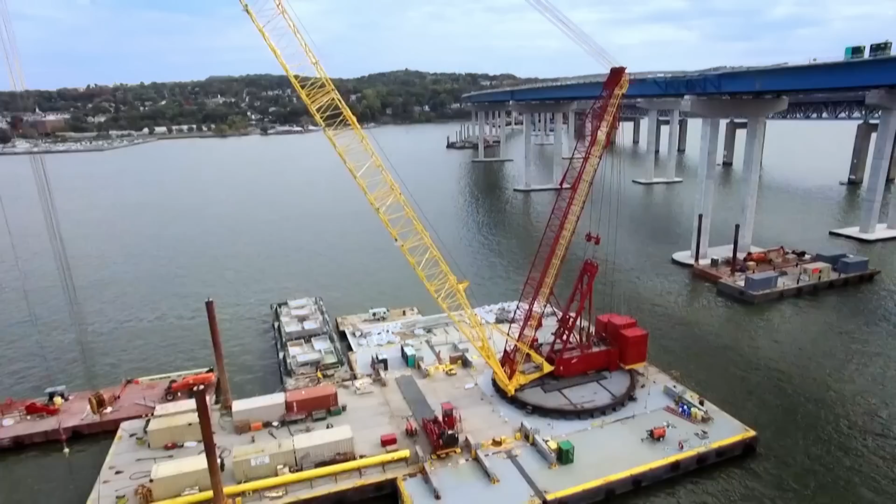In New York, a construction crane comes crashing down onto a landmark bridge. There was enough dynamic energy released that the entire crane essentially fell on its back.

Tragedy strikes a Titanic TV tower in Texas. Oh my God! That scared me to death, because we can't outrun 2,000 feet of tower.

Catastrophe takes out Boston's water supply. The power of water is immense, and you can see why it was a huge disaster at the time.

And in Sweden, Bruce Springsteen fans nearly bring the house down. You can see the roof bouncing. It was crazy.

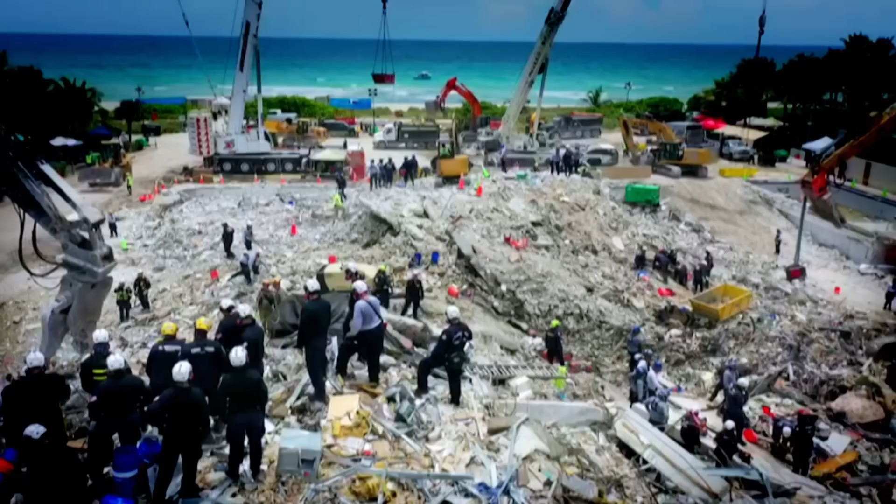With big builds, even the smallest mistake can be a huge disaster. From miscalculations to misunderstandings, some with deadly consequences, these catastrophes are every engineer's worst nightmare.

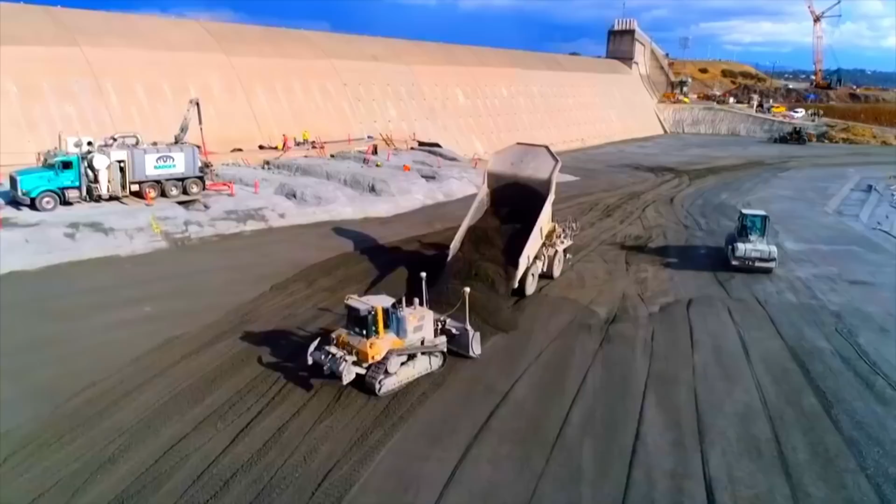Big engineering requires colossal machines to get the job done. But if things go wrong, the catastrophe, like the equipment, can be massive.

Like this disaster in New York State, on a vital Hudson River crossing. This humongous crane going across two bridges, it's a frightening experience. A catastrophic collapse that caught everyone by surprise.

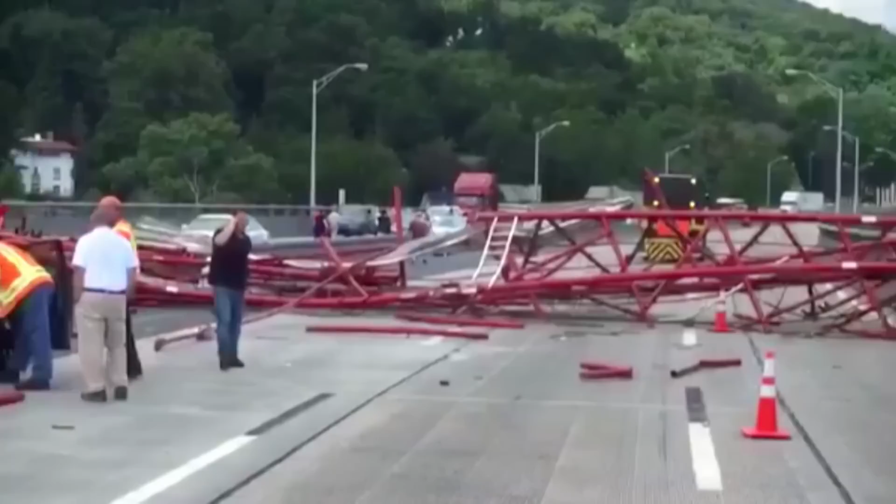I was in shock. I was not expecting this to happen. A very lucky escape for both workers and drivers. A collapse of this nature over an active roadway, this is 1 in a million.

New York City, with over 8 million residents, is the most populated city in the US. The 5 boroughs sit at the mouth of the mighty Hudson River, one of the largest natural harbors on Earth.

Adrian Brugger is a professor of civil engineering. We are a few miles up from New York City on the Hudson River. It has been a powerhouse of transport since colonial times. This river is really the river that made New York City what it is today.

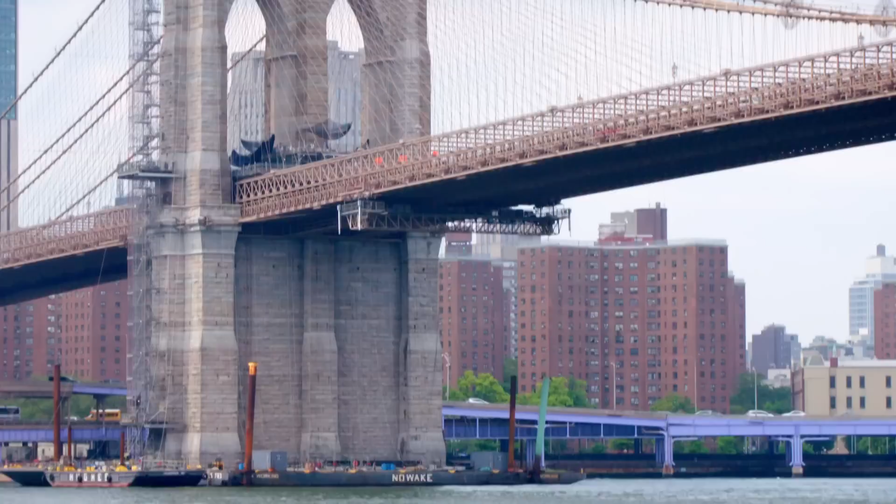With so much water to navigate around, bridges are a fact of life. New York City is carved up by water, and Manhattan alone has 21 crossings, some of them the most famous in the country. But crossing the Hudson is no easy feat.

What makes this river really unique is that it transects the entire state. This river is actually incredibly wide. It presents a significant challenge when it comes to building bridges.

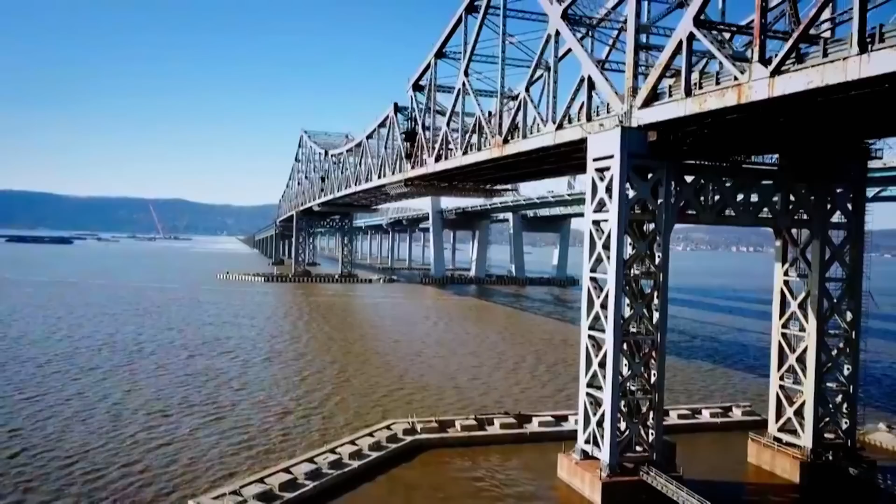Since the 1950s, anyone heading over the Hudson north of New York City crossed over this, the near 5-kilometer-long Tappan Zee Bridge. But after 5 decades, it was struggling.

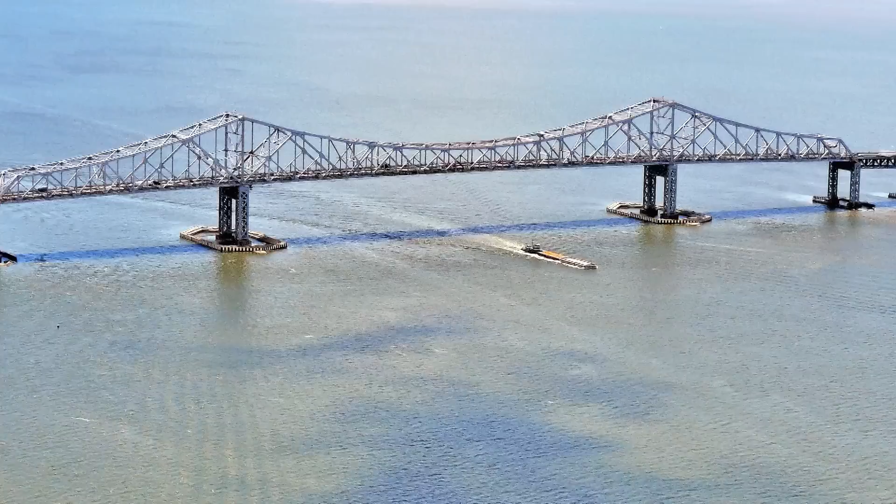The original Tappan Zee Bridge was built in 1955, when traffic was much lighter. By the turn of the century, around 140,000 vehicles were crossing it every day, and it simply couldn't cope.

The need for a new bridge was recognized for decades, and the main goal was not just to replace an aging structure, but also to increase the capacity.

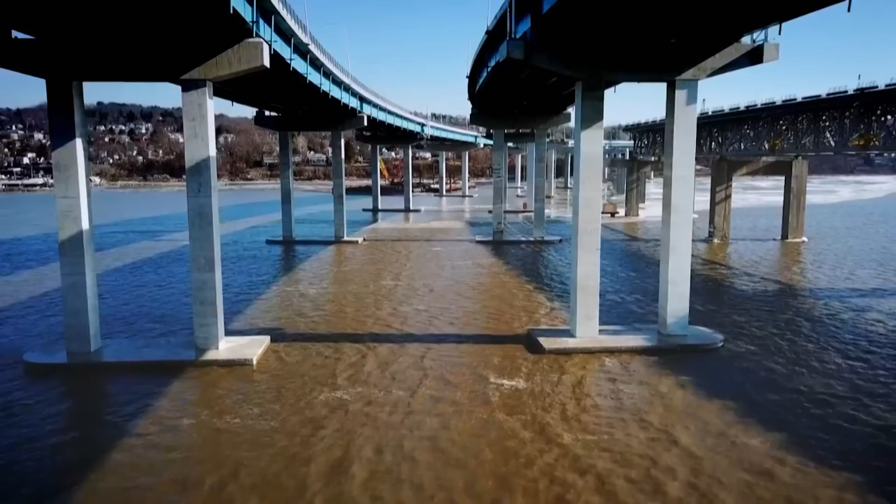Opening to traffic in 2018, the epic new Tappan Zee Bridge cost nearly $4 billion. Its twin spans now carry around 50 million vehicles a year.

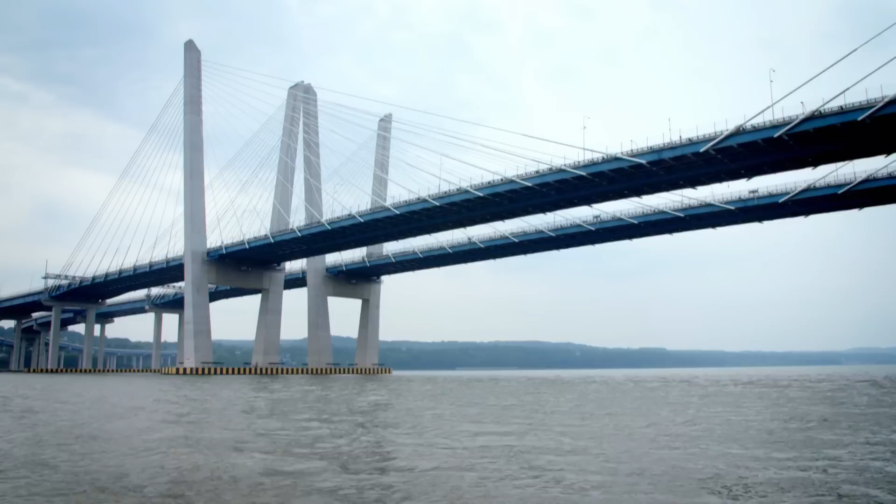If you look at the structure, you'll see that it's not really one bridge, it's actually 2 bridges. They're almost identical, but we have 2 spans, one for the eastbound and one for westbound traffic, that are essentially what we call structurally independent.

Each bridge has 43 piers, 41 of which are anchored to the bottom of the very wide and very deep river. The only way to create solid foundations for the huge bridge to carry immense loads was to drive hundreds of steel piles deep into the bedrock.

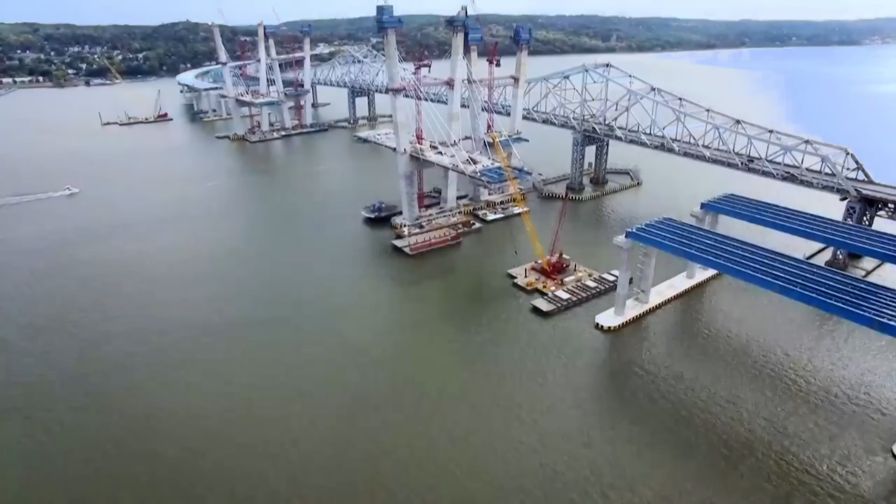Driving piles through more than 30 meters of mud and clay, all the way to firm foundations, called for a massive crawler crane with an enormous hammer.

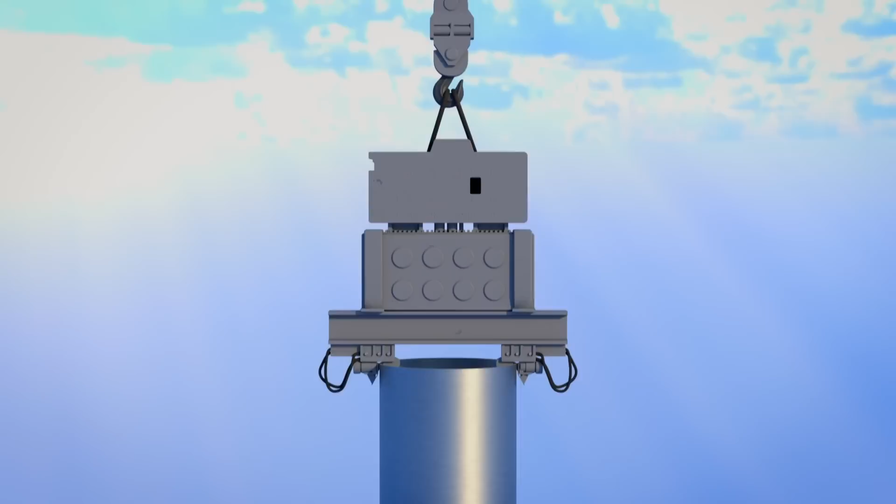You had this absolutely enormous crane and this vibratory hammer, which is this big block of steel that shakes the entire thing vigorously. They actually use this and the self-weight of that whole system to just push the pile into the mud.

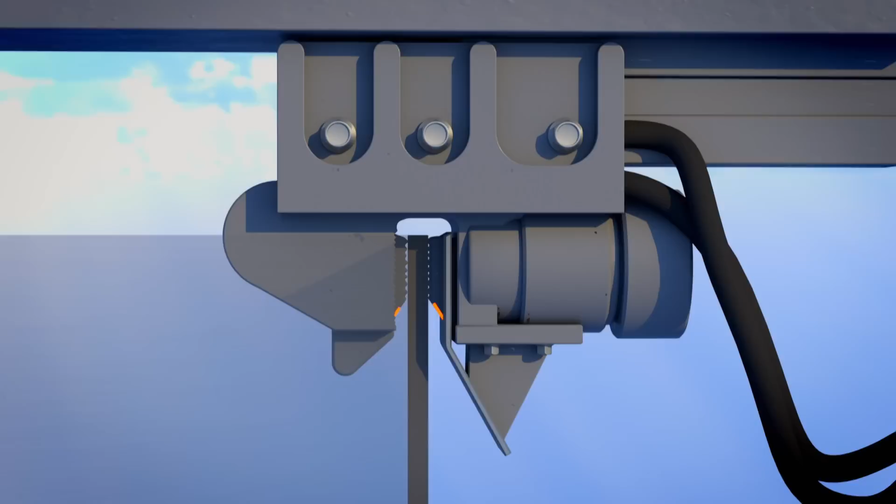The hammer keeps a tight grip on the pile with what's known as jaw plates. As it vibrates, the whole system works with gravity to drive the pile downwards.

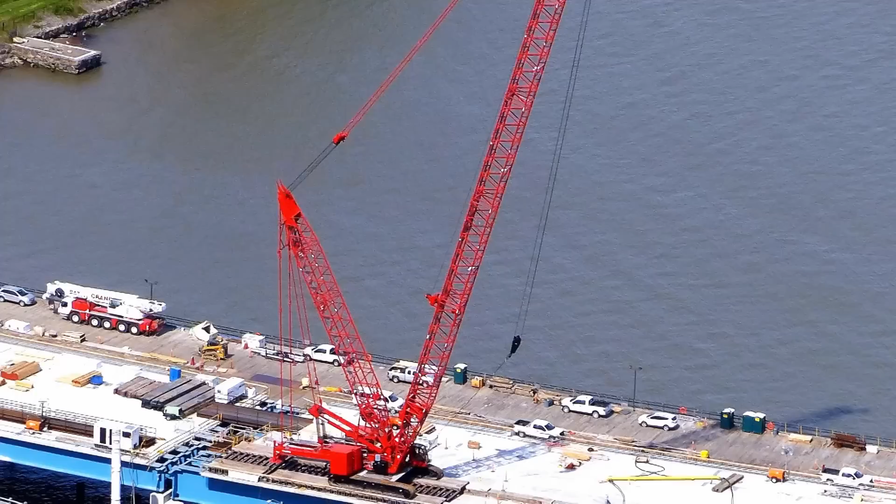These cranes are serious pieces of hardware. The boom on this thing is almost as tall as the Statue of Liberty, and they're capable of lifting around 300 tons.

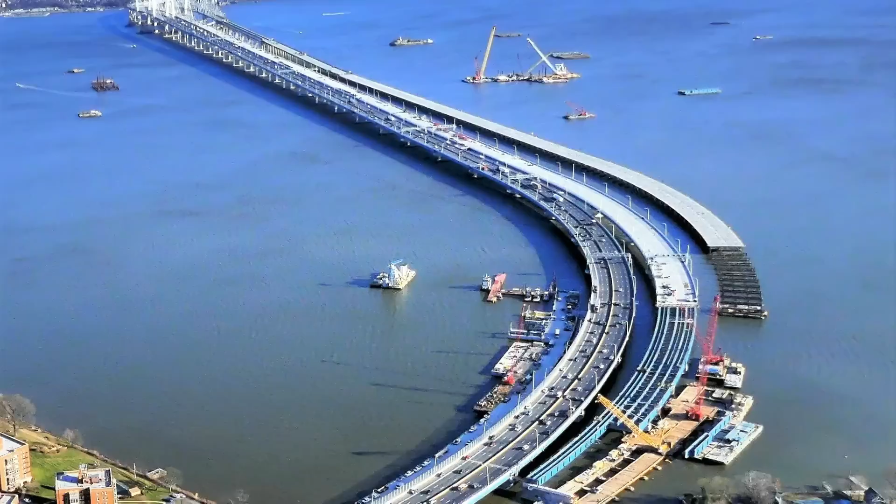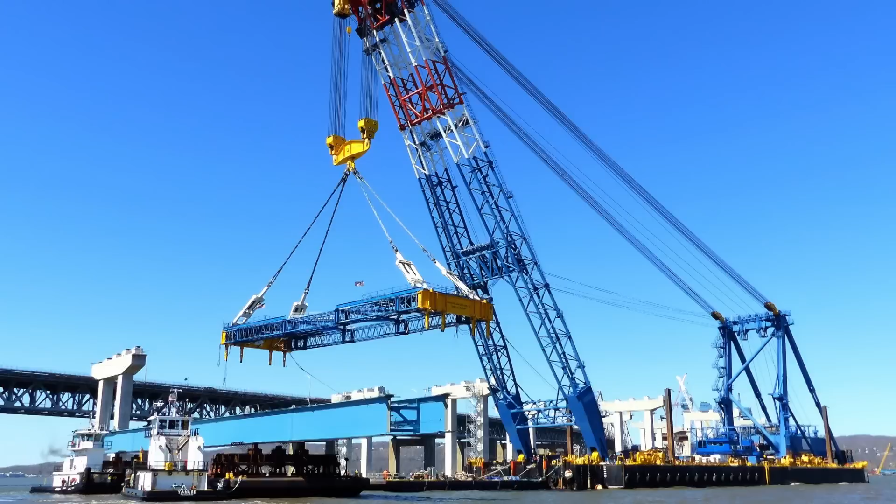Freelance photographer David Rocco wanted to immortalize this mighty construction on film. It was just fascinating to have this right in your own backyard. I was just out there watching the project day by day, waiting for those moments to get the right shots.

But the most incredible images that David captured would be memorable for all the wrong reasons.

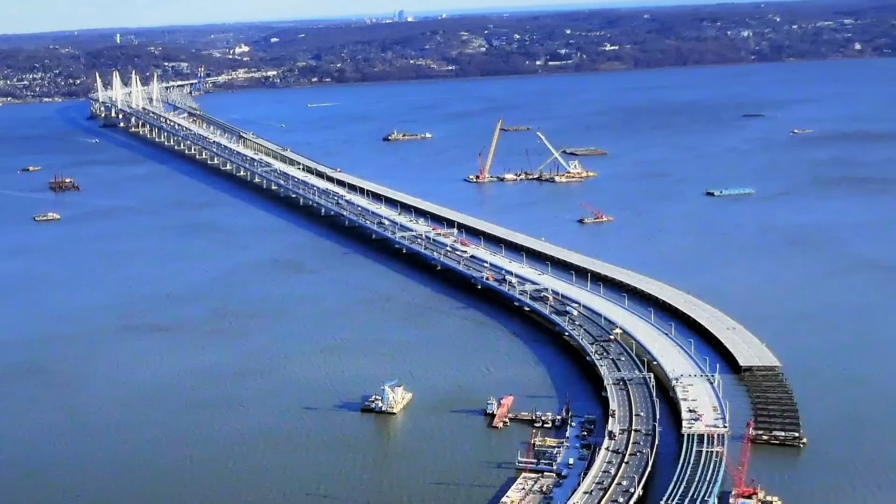Tuesday, July the 19th, 2016, the crawler crane was positioned on the newly constructed westbound span, driving piles for one of the eastbound piers. The pier would stand on 14 steel piles, 3 feet in diameter, driven deep down into the bedrock. 3 piles had already been successfully placed.

Diana Cortez from the Occupational Safety and Health Administration knows the story. They were in the process of driving the next pile with the vibratory hammer.

During the 4th pile, as they were driving it, it went off plumb. So essentially, it was driving crooked.

The crane operator attempted to lift the pile, but he was having trouble getting it all the way out of the mud.

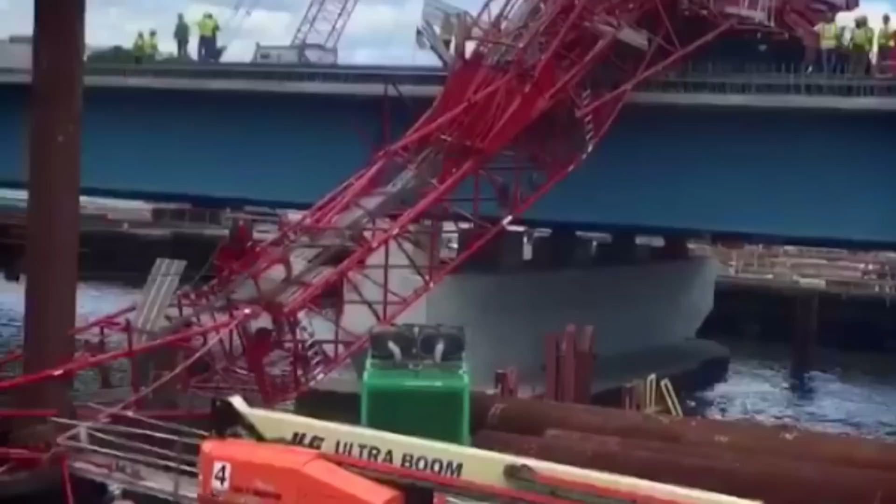Right around noon, disaster struck. With traffic moving in both directions, the massive metal boom crashed down onto the old crossing.

David Rocco got word that something was very wrong.

I got a beep from somebody on my cell phone that said a crane collapsed on the Tappan Zee Bridge, and I said, oh, wow. David chartered a helicopter and began capturing the catastrophe on camera.

We shot straight across in the helicopter, got there in less than 10 minutes, and I was going to be on top of it, literally, 1,500 feet above it.

From his bird's eye view, the scale of the devastation was clear. It's just remarkable to look down there and see this humongous crane going across 2 bridges and hanging over the other side. That's a sight I'm never going to forget.

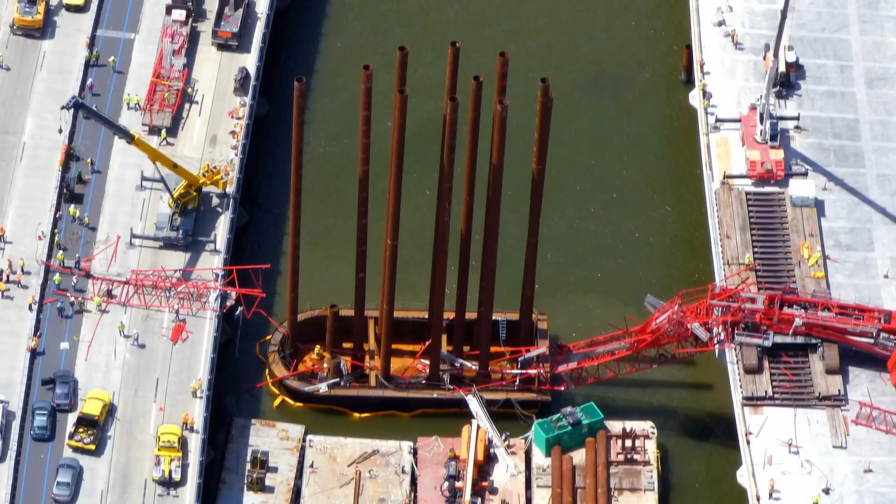Tons of steel were lying across the bridge with traffic at a complete standstill.

OSHA official Diana Cortez was in her office when news of the disaster broke. When I first heard about the crane collapse, I was in shock. I was like, oh my God.

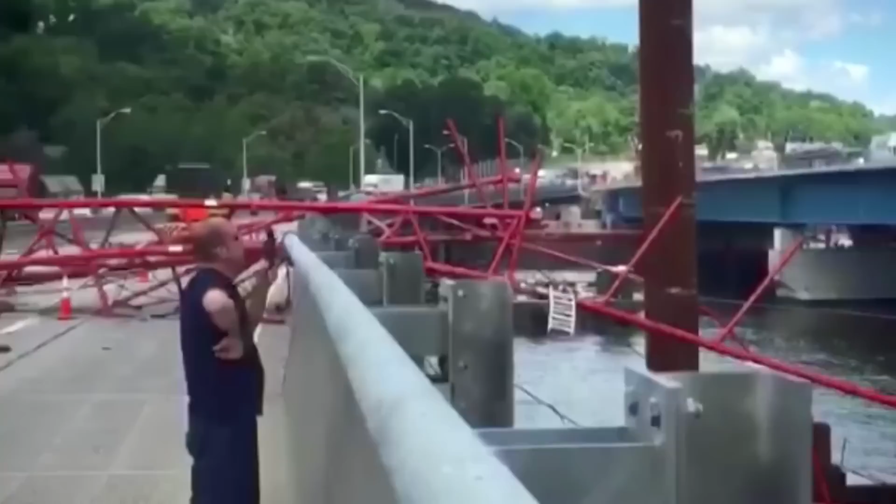Looking at the boom across the road and the traffic jam, the people out of their cars, it was quite a scene. It was actually horrific, to say the least.

Despite the devastation, this disaster had narrowly avoided turning into tragedy. The boom fell totally across the Tappan Zee Bridge. It didn't hit not one vehicle. So it was a miracle.

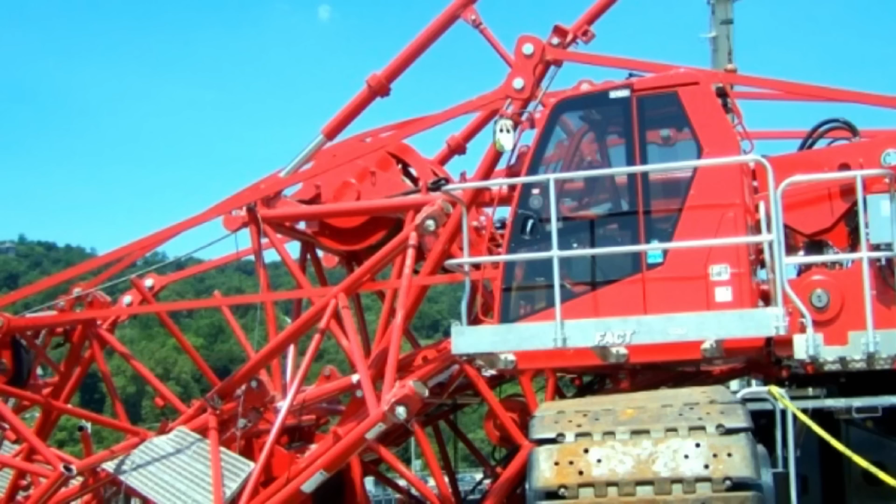A collapse of this nature over an active roadway with no major injuries and no fatalities, this is sort of a 1 in a million. This is actually quite amazing that nobody was hurt. Even the crane operator, though he probably got the shock of his life, escaped unharmed.

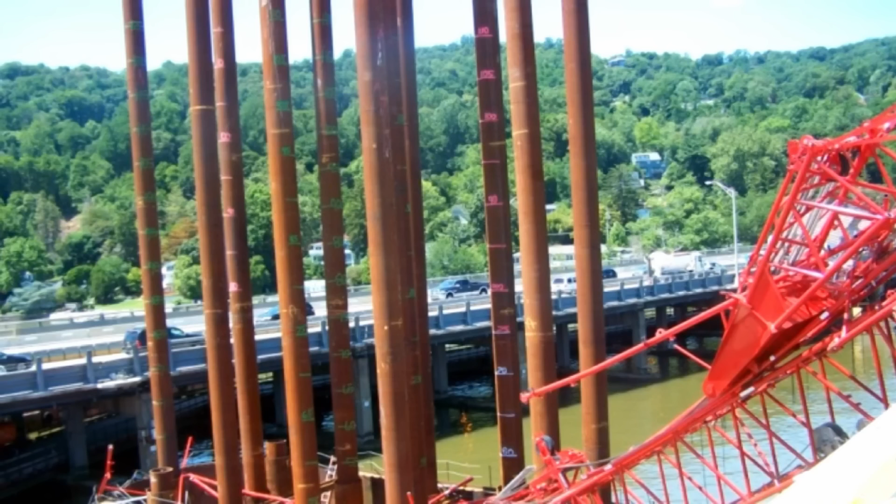In the immediate aftermath of the disaster, the big question was what had caused this gigantic crane to collapse.

Diana Cortez led OSHA's investigation. As the area director, I immediately sent a team to initiate an investigation, also eventually to make some recommendations to prevent recurrence.

Attention quickly turned to the vibratory hammer, which had successfully driven 3 piles on this pier.

But with the 4th pile, things didn't go as planned. After 3 minutes of driving, the pile became stuck at an angle.

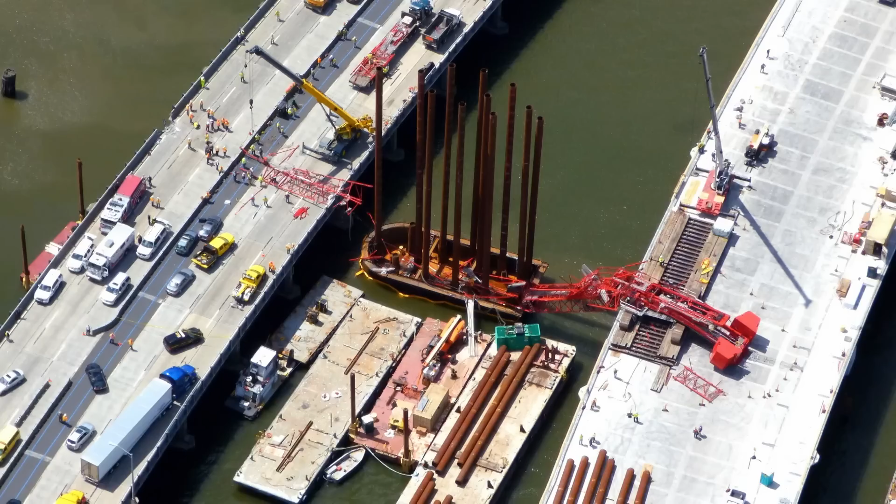Now, what happened at that point was in an effort to try to free the pile, instead of just winching up, he actually pushed the boom of the crane up, and the vibratory hammer that was holding onto the pile with essentially a set of jaws ripped free.

And this is where things went horribly bad. This caused the boom to recoil in the upward position, and then when it came down, it caused the boom to structurally fail because of the sudden jolt and collapse and fall right onto the Tappan Zee Bridge.

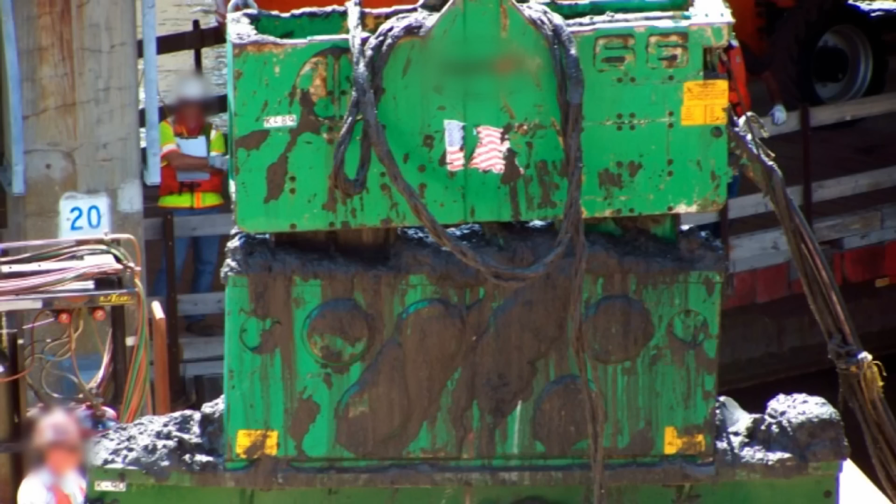Investigators needed to determine whether force or failure had caused the hammer to rip loose, so the evidence was salvaged from the riverbed after it was pulled back out of the Hudson.

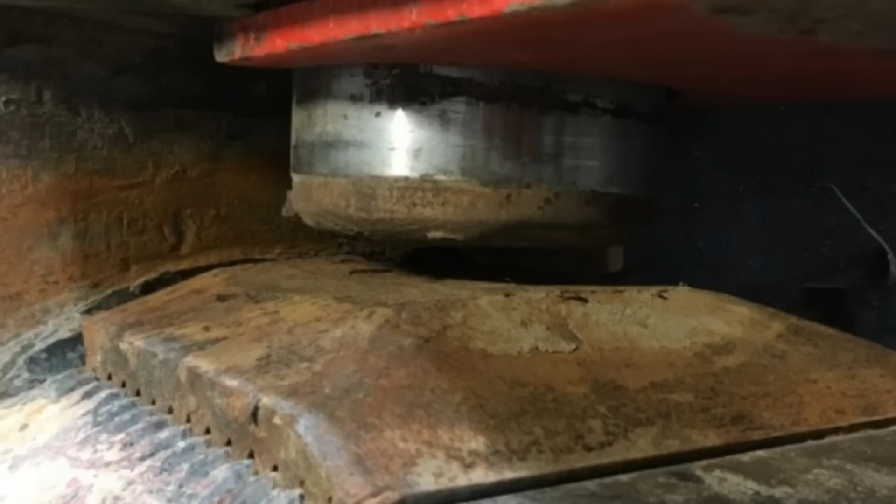They found that the jaws, which looked very much like the jaws of an animal that grabbed the pile, had a bearing plate that was essentially the teeth, and it was actually a flat bearing plate. This is partially why this jaw ripped loose.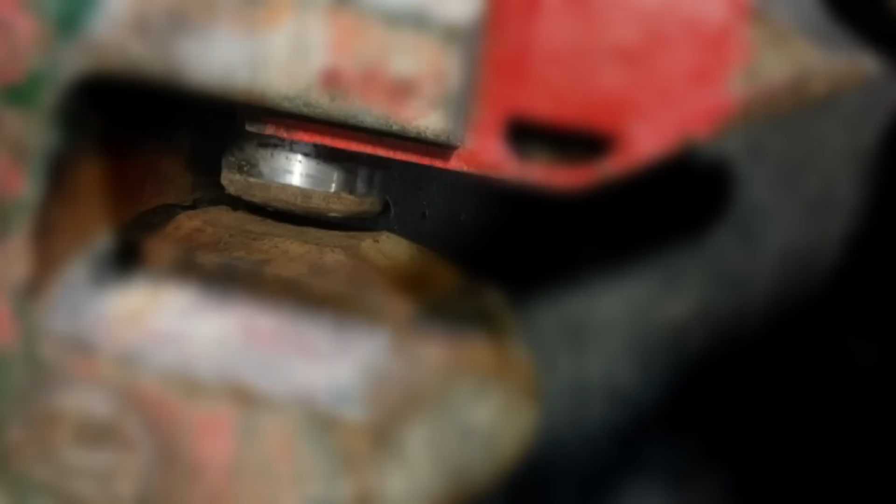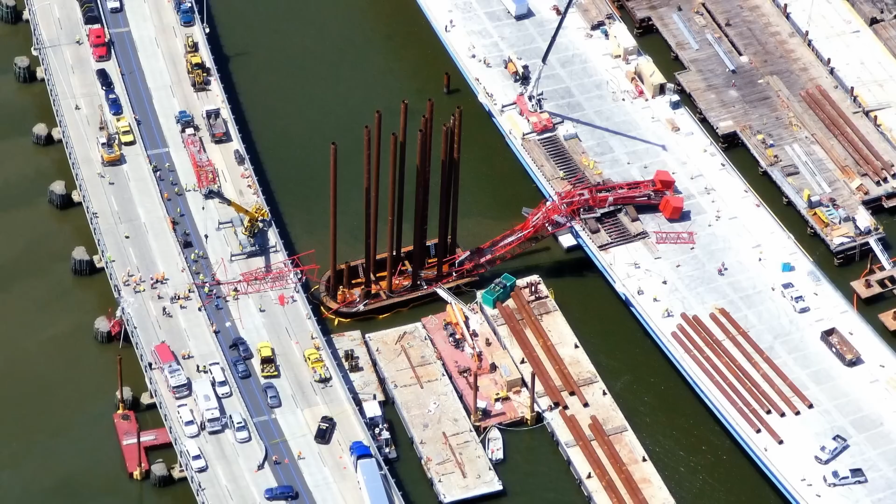Also, what was found was that the bearing plate was corroded. Ultimately, the lack of teeth combined with corrosion meant the jaws lost their grip, triggering this catastrophe on one of the state's key bridges.

After the disaster, the wreckage was cleared, and just 6 hours later, this vital crossing was partly reopened. Aside from a few buckled railings, neither bridge suffered any real damage.

Of course, this is an enormous crane that collapsed onto this bridge, and the impact was significant and terrifying, but in the end, this is major civil infrastructure that is built for the ages and built to absorb gargantuan forces.

So even with this crane collapsing on a brand new bridge, the bridge suffered essentially no damage.

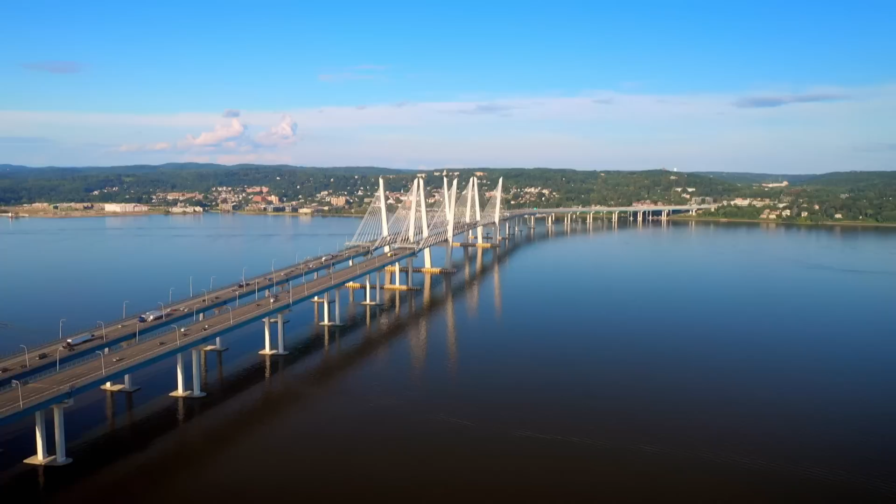The disaster only set the project back a few days, and on September 11, 2018, both spans of the new crossing were fully opened. This is a lesson that on every project, every piece of equipment needs to be in perfect working order.

While it might cost time, ultimately it can prevent catastrophe.

In big engineering, every project brings unique challenges. But even a small change in plan can lead to catastrophe.

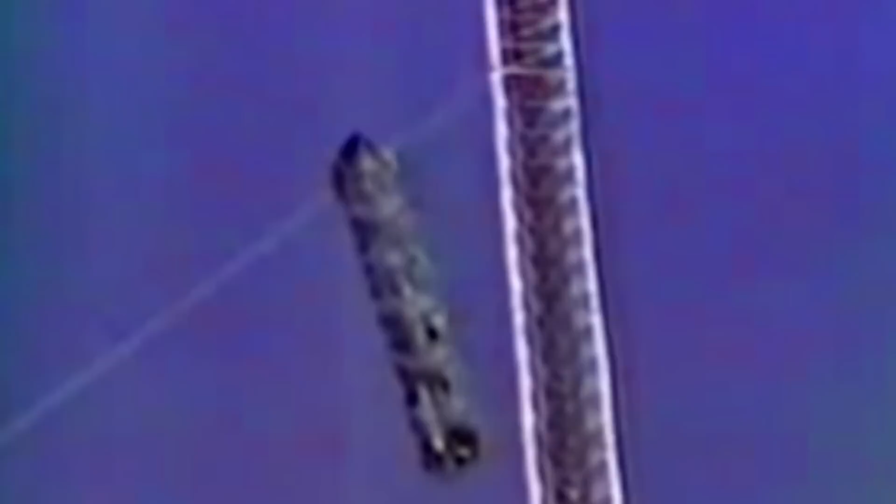Like this disaster in Texas, a devastating collapse of a supersized structure. A TV tower taller than the Empire State Building came crashing down to Earth. Miscalculations that led to destruction on an epic scale.

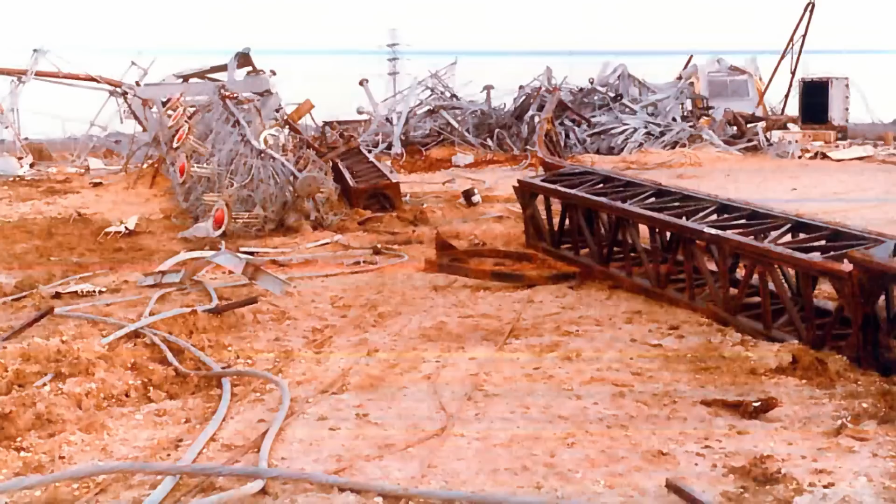People said, okay, we got problems here. It's that last piece that got them. It took 30 to 40 seconds for the entire tower to fall, which seemed like a lifetime. The obvious question: what had gone so badly wrong?

Houston, Texas has long been one of America's fastest growing cities. In the 70s, oil was driving the boom, and downtown the skyline was soaring too. Back then, America's favorite pastime was watching TV, and it still is today. But all those huge buildings popping up in downtown Houston were causing havoc on TV and radio signals.

The only solution, in true Texas style, was to build bigger transmission towers. This site southwest of Houston houses some of the tallest structures in the US, like the Senior Road Tower, standing at a jaw-dropping 600 meters.

Former broadcast engineer Bill Cordell oversaw the tower's construction. Building a structure of this height, 2,000 feet or in that area, comes with real unique challenges in the fact that you have to have special rigging, you have to have special people that know their business. Otherwise, you can get yourself in trouble because those are big boy towers.

December the 7th, 1982, the final 18-meter-tall antenna section for the original tower was being hoisted into place. Broadcast engineer Bill Cordell asked a colleague to record this crowning achievement. I had Andy, a good friend of mine and engineer that I've known for many, many years. He was very good at filming. Well, I had him in the back of my truck looking straight up.

5 workers were on the tower to secure the final piece. It was supposed to be the cherry on top of the cake, so to speak, because once they put the antenna in place and bolted it in, we were practically done. Instead, with the antenna more than 300 meters up in the air, what Andy captured was the stuff of nightmares.

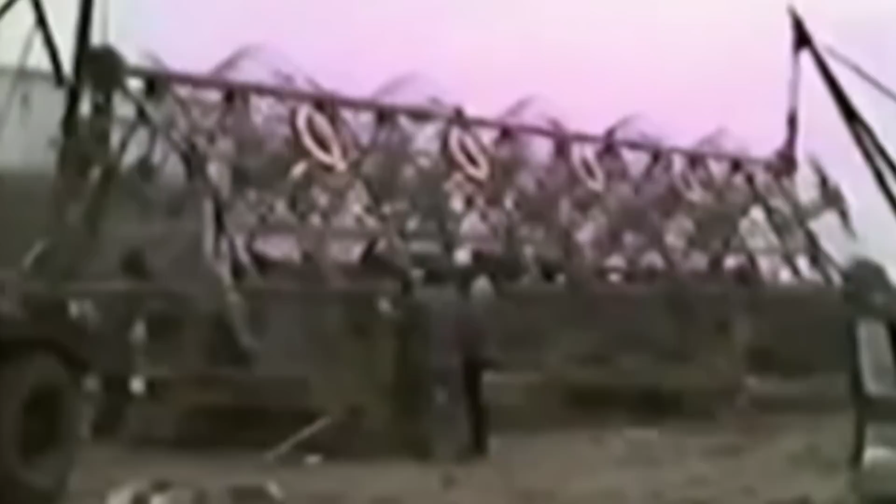What had caused this supersized structure to come crashing down to Earth? It seems there was a problem with the lifting plan, which had worked for the main tower sections, but with the antenna, there were complications. The final piece of antenna had those all-important microwave baskets already attached to the sides. As the antenna was hoisted upright, there was a risk the lifting cables would damage the sensitive microwave baskets.

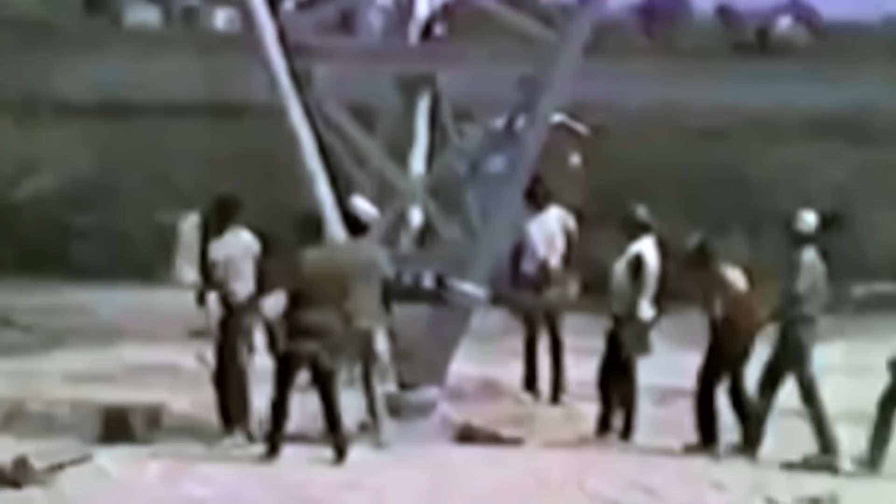Lee Lowry was on the team that investigated the collapse. The people said, okay, we got problems here. This great big basket that shoots out all the signals, and the wire to raise the whole piece with it, it's going to hit them. The baskets were too sensitive to remove.

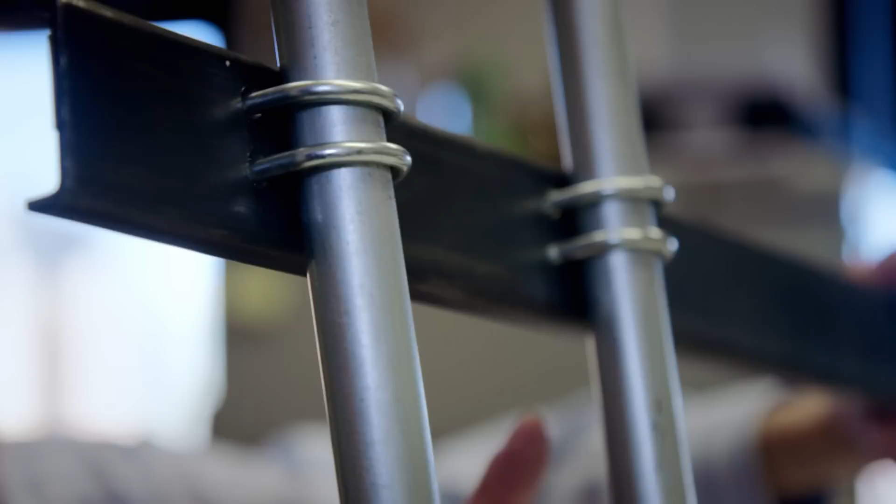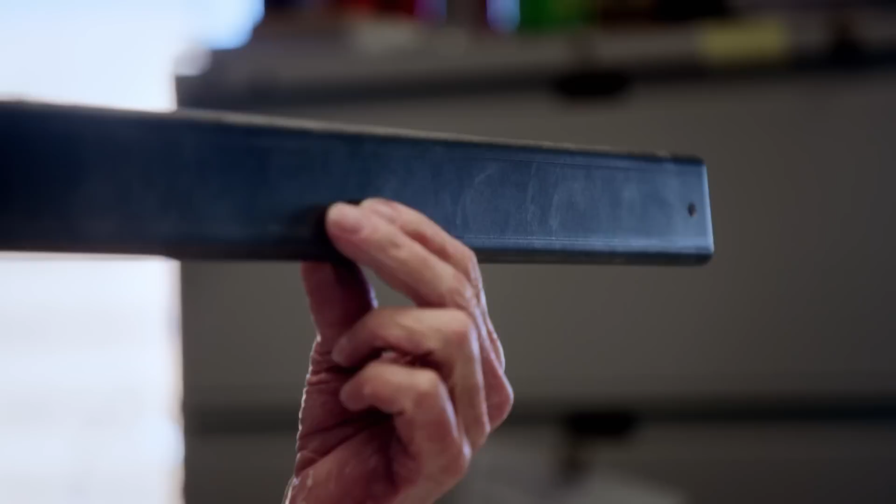Instead, the team custom-built an attachment to keep the antenna safely at an angle. The antenna were bolted with what they call U-bolts because they look like the letter U. The cable goes up in the air, and first thing you know, the whole thing starts raising up like this. The extension of this piece of steel far enough down the road so that where you attach the lifting cable will, when it goes up in the air towards the top of the tower, the cable itself doesn't touch the microwave baskets. And it never did.

Hoisting the antenna at an angle prevented the cables from tangling with the microwave baskets. But after examining the wreckage, Lee found evidence that the fix had overloaded the U-bolts.

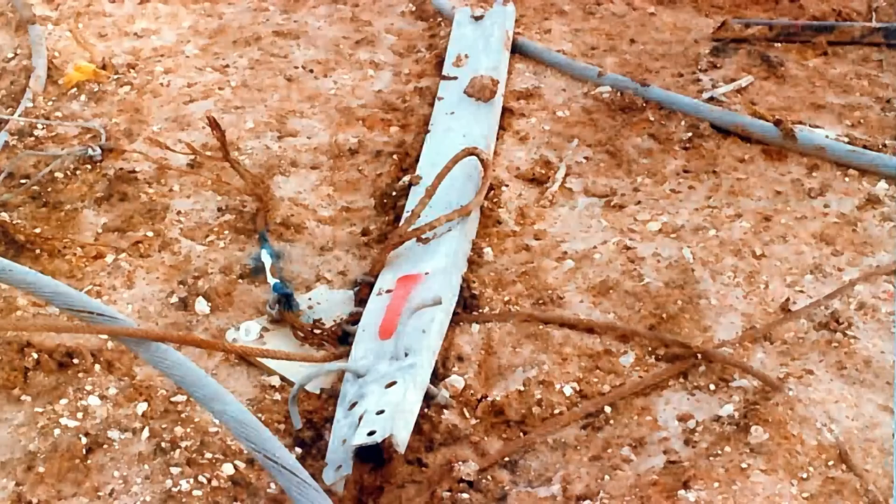That's the way I found it. That's where it was. This is a U-bolt. Used to be a U-bolt until it got straightened out by being pulled out of the hole. Lee and the team calculated that the load on the U-bolts had been underestimated by a factor of 7. The force that broke the bolt in the first place just pulled the bolt back out of the opposing hole and straightened the U-bolt out pretty much straight. That is the failure. That's the only failure.

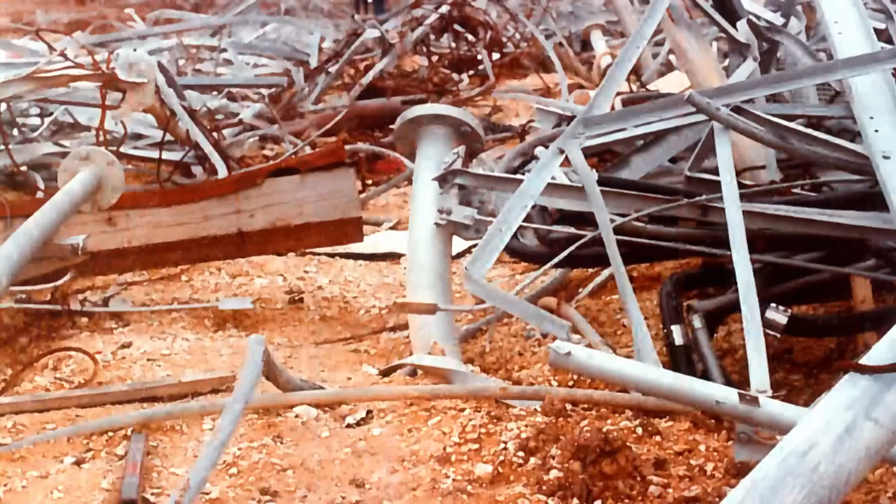It's that last piece that got him. As the antenna was lifted closer and closer to the top, the U-bolts were struggling to cope with the strain and failed. There was nothing anyone could do.

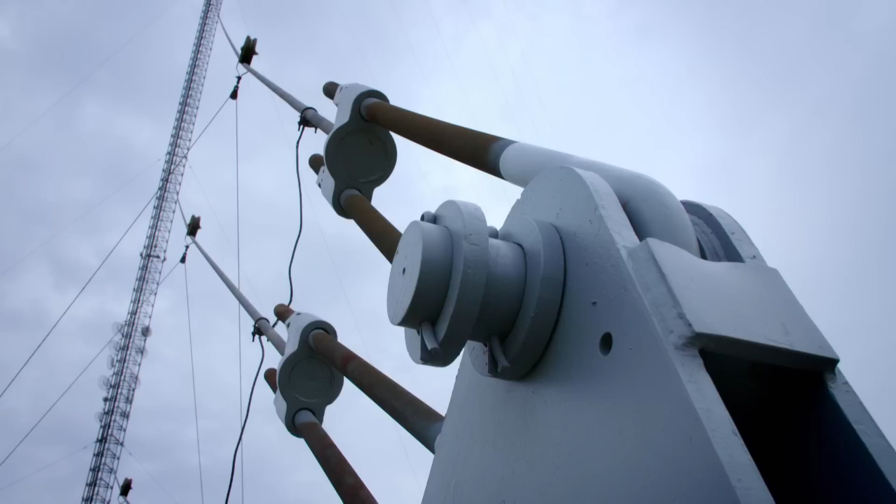Following the catastrophic collapse, the tower was rebuilt piece by piece. Bill Cordell served as project manager on the new construction. The second tower, the lifting process was changed quite a bit, and it was extremely well thought out and blessed by professional engineers before anything was done. And of course, none of the rigging or U-bolts that they'd used before was even considered.

A year after the disaster, the new 600-meter tall tower was finally complete. While the team still pays tribute to the young men who sadly lost their lives. The gentleman that filmed it that day, Andy and I talk each year, and we remember and have a great deal of remorse for the young men that lost their lives here.

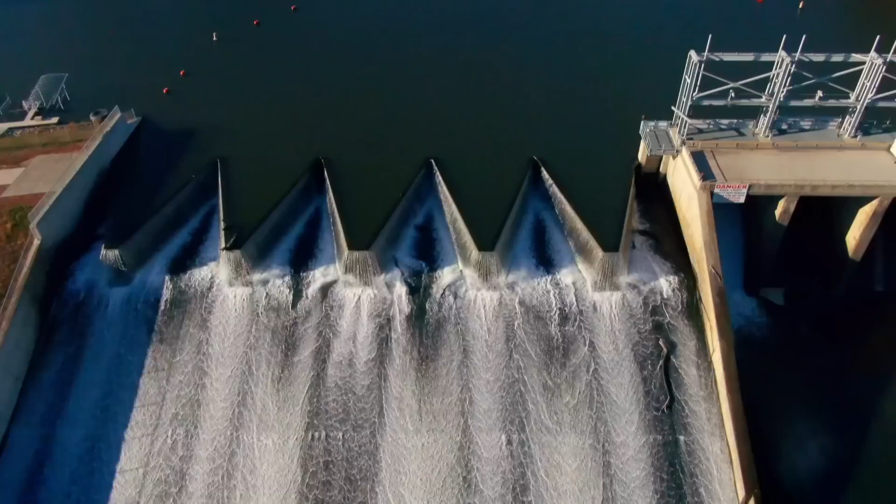With massive infrastructure, even the smallest component is crucial. One tiny fail can cause a huge catastrophe.

Like this story in Massachusetts that wiped out a vital water network. This catastrophe triggered a state of emergency for 2 million people. People were unable to cook, to drink, to bathe. An underground mystery that had engineers guessing. Everyone scratched their heads. That's a new pipe. How could that happen?

Boston, Massachusetts is one of the oldest cities in New England and owes its long existence to the Charles River. Bob Zimmerman is former director of the Charles River Watershed Association. Water is the single most important substance on Earth for life. All of us are dependent on it. Without it, in 2 to 3 days, most of us die.

Like many big cities, Boston relies on large-scale clean water storage reservoirs located outside of the city limits. Fred Thys is a local journalist. The metropolitan area of Boston requires a lot of water to keep it going. And in the 1930s, a major reservoir was built called the Quabbin Reservoir, and then another big reservoir, the Wachusett Reservoir. These two reservoirs combined hold enough water to supply Boston with fresh water for 5 years. But to reach the city, there's a more than 50-kilometer journey from reservoir to tap.

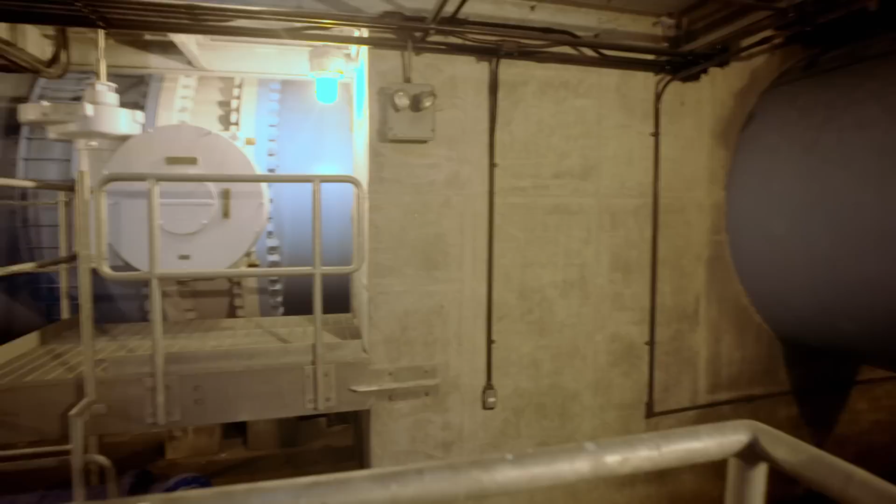In 1996, to stay on top of demand, the Massachusetts Water Resources Authority started work on a brand new pipeline. The Metro West Water Supply Tunnel is the main tunnel that brings the water from the Quabbin and the Wachusett reservoirs to the Boston metropolitan area. These pipes are a massive 10 feet in diameter. 250 million gallons of clean water a day can flow through them to 31 towns and cities, including Boston. These big tunnels supply water to millions of people, and should one of them be cut off, all of a sudden you have a big part of the Boston metropolitan area that finds itself without water.

Hidden from view, the underground aqueduct was a great success. But in 2010, disaster struck.

10 a.m., May the 1st. Fred Laskey, executive director of the state's Water Resources Authority, received a call. My chief operating officer is unflappable, but when he called, there was a sense of urgency. And when he explained to me where it was, I said, oh no, oh no.

The Metro West Tunnel had burst open in Weston, more than 20 kilometers from downtown Boston. When I got here, it was gushing. It looked like the telephone pole nearby was going to go. The whole thing was just eroding, churning up all the dirt.

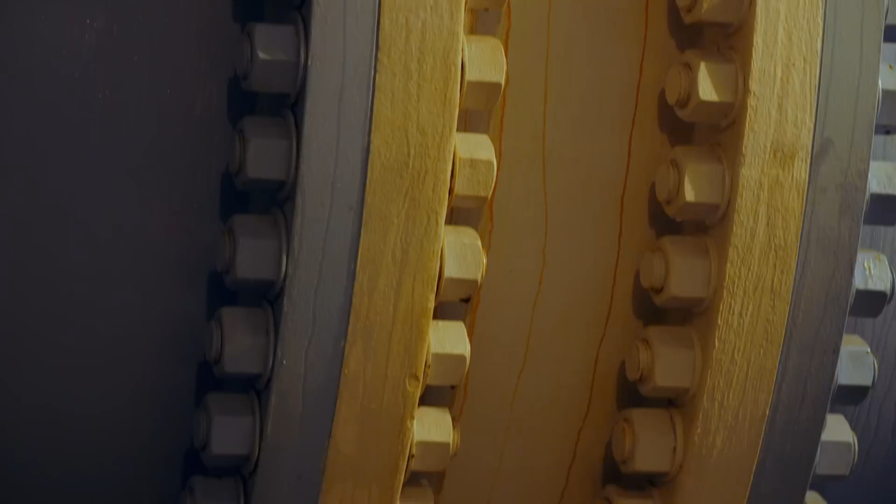Boston's clean water supply was surging up from underground. There were 8 million gallons an hour flowing from this site into the river. The power of water is immense. You think about a 120-inch barrel of pipe with water coming towards the city under great pressure, and you can see why it was a huge disaster at the time.

Everybody starts to immediately think, well, it can't be that big a deal, right? It's just a pipe. But it is a big deal. 8 million gallons an hour is a get-your-attention amount of water, a real issue.

Not only was clean water pouring out, dirty earth was being sucked into the pipes, potentially contaminating everything heading for Boston. This was an even bigger problem when we found out that people were unable to cook, to drink, to bathe. About 2 million residents had to begin to boil their water for drinking and get as much bottled water as possible. The following day, the leak was stopped, but Bostonians were still without clean water.

It's front page in the Boston Globe. It's on the news every single night. Every family east of here who has to boil water or go out and buy bottled water knows about it and is concerned about it. This was national news. President Obama even signed an emergency disaster declaration. More than 1 billion liters of water had escaped.

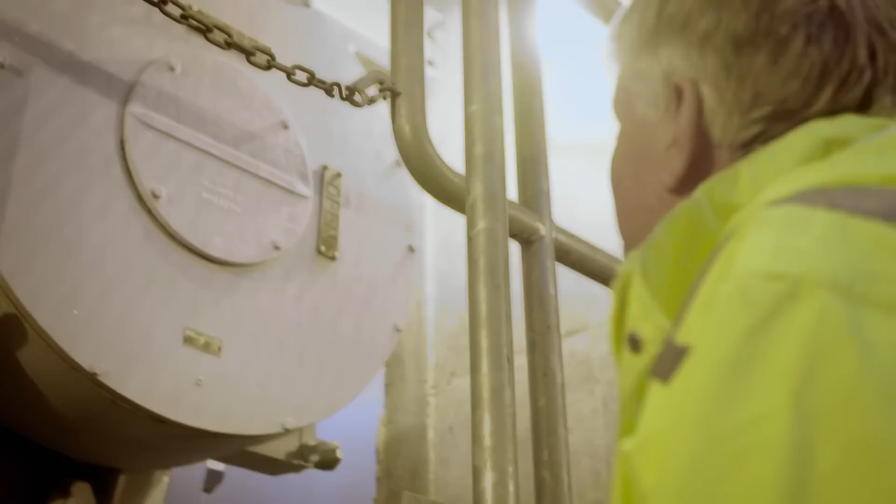The race was on to get to the root of the problem. Everyone scratched their heads. What happened? How could that be? That's a new pipe. How could that happen? Well, a 10-year-old aqueduct is brand new, and for it to blow out, something seriously bad happened.

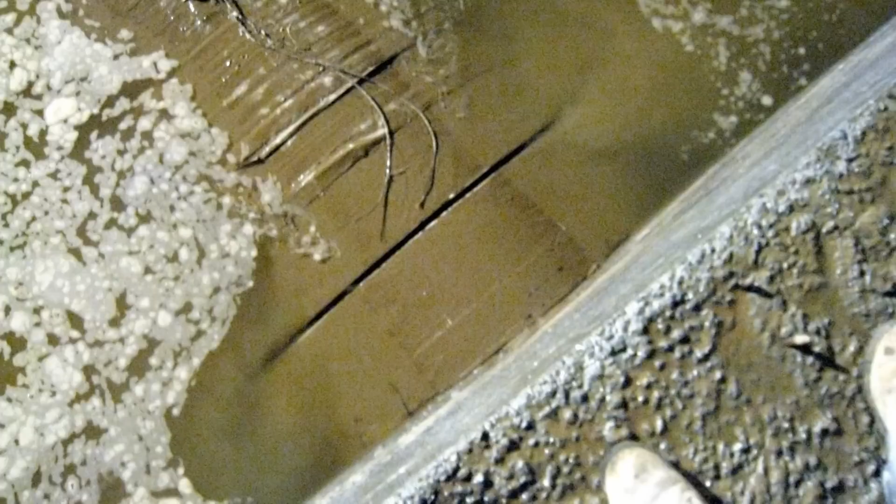As the debris was cleared, it revealed a small but crucial piece of evidence. The amazing thing is after all the earth had been moved, there was a pond of water. When we pumped that out and the top of the pipe started to surface, we realized that all that water was coming out in a gap between the pipes all the way around of about 1 inch. It was just an incredible lesson in the power of water.

The source of the leak was clear, the joint between two sections of pipe. But the question was, why had the connection failed? Dr. Zorica Pantic chaired the investigation. As a panel, we looked at the possible scenarios that caused this failure.

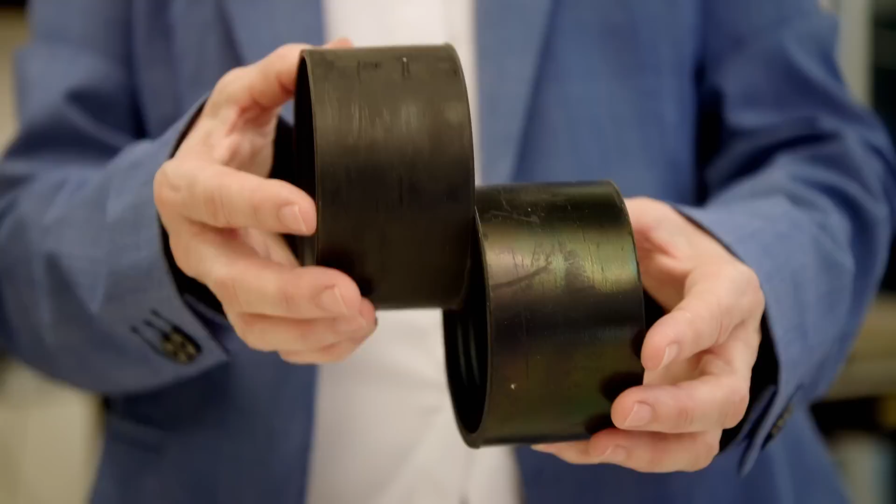One would be the vertical shear, so the pipes moved in the vertical direction. When we looked at the site, we realized that the pipes are still aligned, so that means that the vertical shear was not a possible scenario. So then we focused on the coupling and looked at what happened with the coupling.

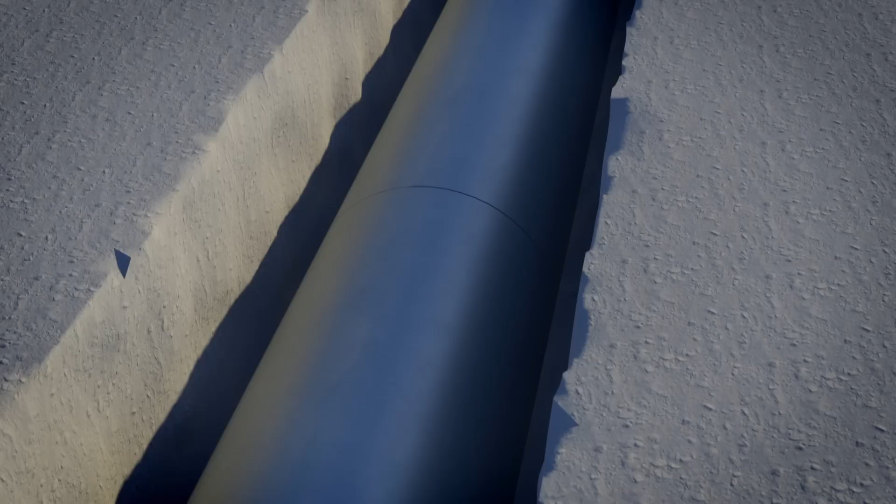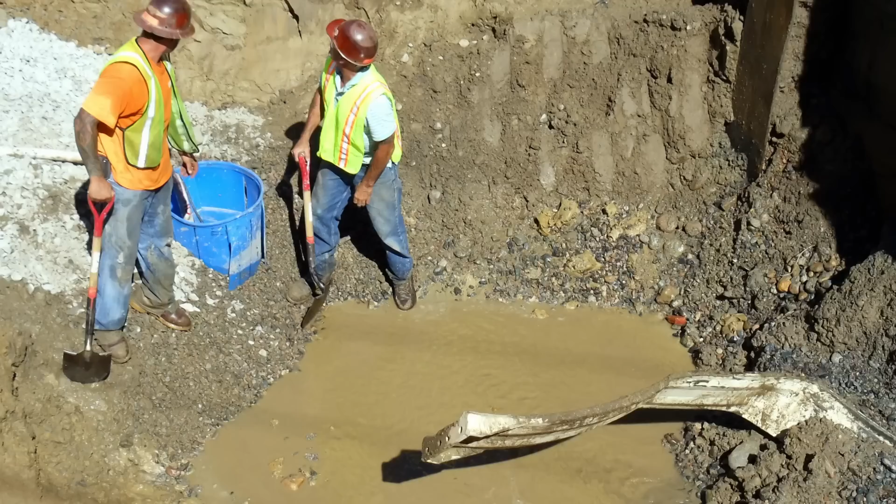The two pipes were clamped in place with a two-part steel coupling collar, held together with 8 steel studs more than 2 centimeters wide, secured by 16 nuts. As investigators dug deeper, it was clear the collar was buckled completely out of shape. This huge 1-ton piece of steel clamped 2 sections of pipe together with a vice-like grip, but it had failed catastrophically.

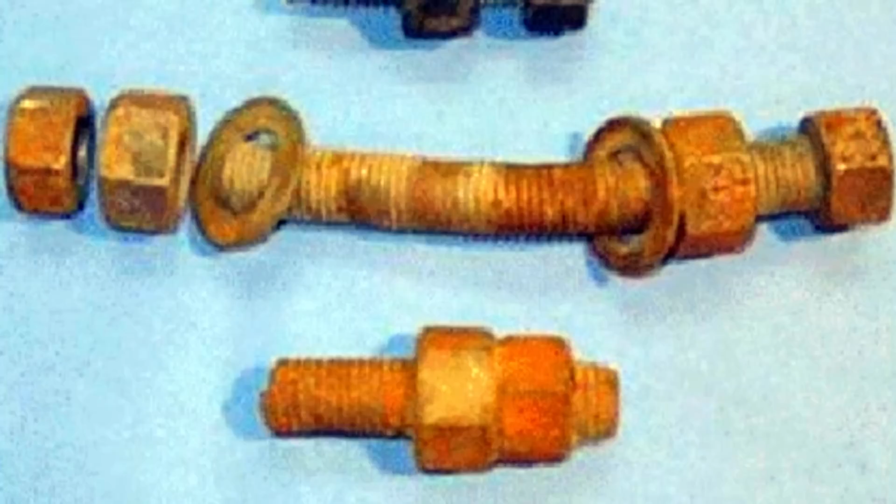The question was why? Further inspection revealed that 7 of the 8 studs holding the collar together had broken. So basically, out of 8 studs that were supposed to be there, only 3 were found, and only 1 was still connected to the coupling.

Examining the studs revealed a flaw. What we found out is that there were cracks in these studs, both in the valleys and on the hills and the tops of this.

Dr. Pantic's team concluded that the cracking had happened during manufacturing. Once installed underground, the studs were vulnerable to corrosion. When they were installed, they worked for a while until the environment caught up with them. That caused corrosion along these cracks in the studs, and once those expanded, the studs started to fail and break.

Ultimately, the faulty studs were simply too weak to do their job. Huge amounts of water were being pumped through these pipes at high pressure. Without a rock-solid connection, the coupling was doomed to fail.

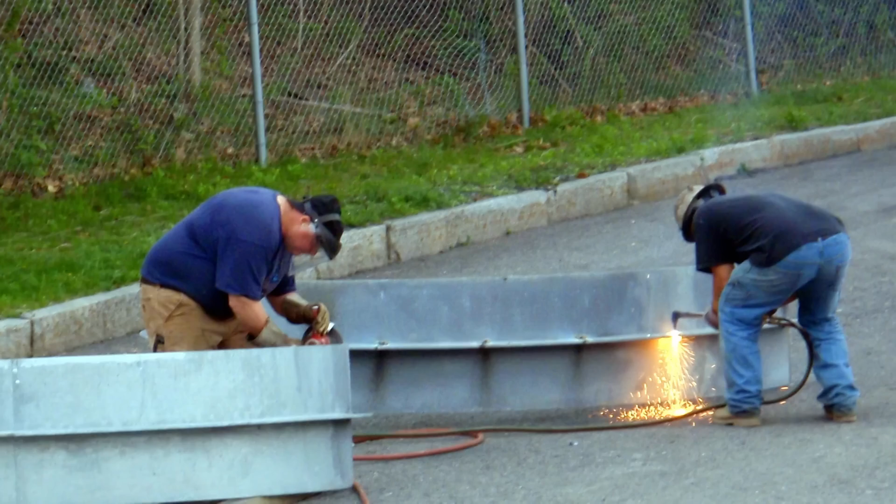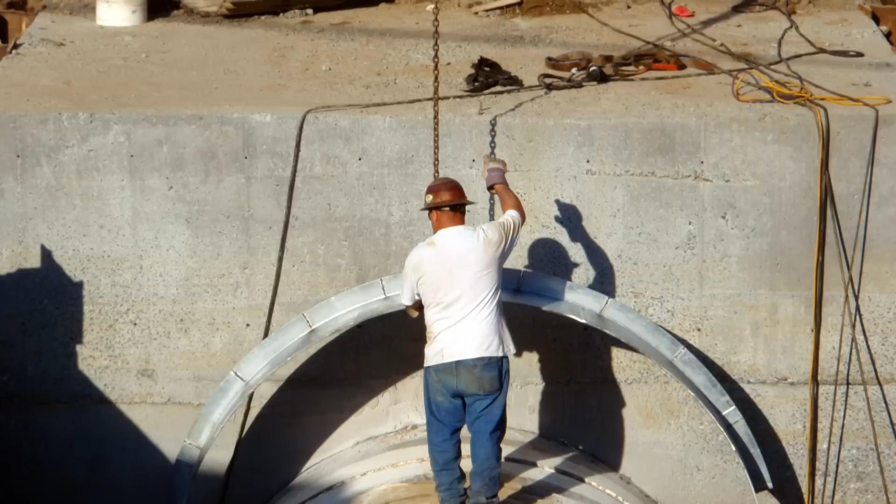Millions of residents were without mains water, so engineers worked around the clock to repair and flush clean the Metro West pipeline. We had one group of people working on addressing the leak and fixing it. We had another whole group of smart people who were dealing with the hydraulics and the water quality issues and how do we get it turned back on to make sure it was safe. Because that would have been a real disaster if there was contaminated water.

On May the 4th, just 3 days after the joint failed, the repaired pipeline was back in action. When clean water was finally restored, it was a huge relief for residents and a reminder of how dependent we all are on the infrastructure hidden beneath our streets.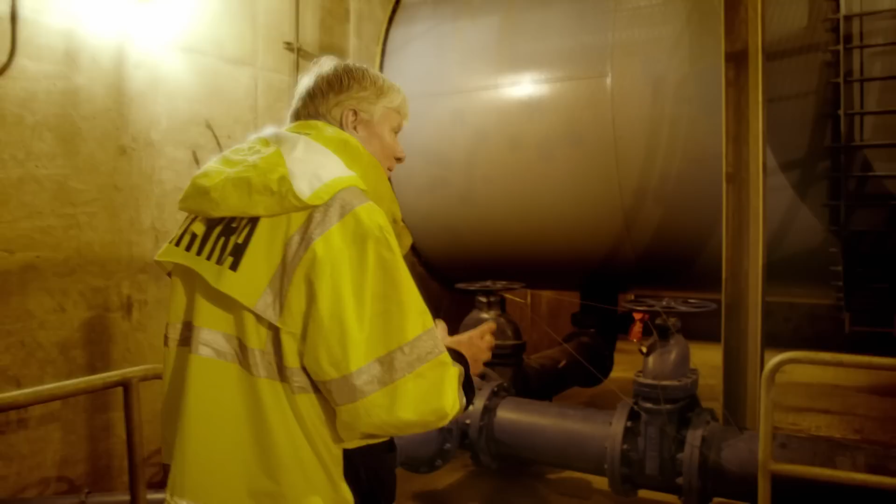To avoid a repeat disaster, a parallel pipeline known as the Hultman Aqueduct was upgraded, ensuring there was always a route for clean water to reach Boston. We are now in a vault chamber that connects the Hultman Aqueduct to the Metro West Tunnel. And this was constructed after the water main break to create the redundancy that we need to safely operate the system in a major event.

This time clamped solidly together by hundreds of studs. And you can see the massive size and the strength in these couplings.

The events of May 2010 serve as a reminder of the massive task engineers face keeping our vital infrastructure operational. It was a big wake-up call because we all face issues associated with infrastructure, much of which is getting pretty old at this point. And as it fails, people are impacted. Nature is impacted.

Two lessons to learn from this, right? One is we take water for granted. We just never think about it. We turn on the tap and there it is, and we use as much of it as we want. The other is how critical just one little point of failure can be.

When engineering goes wrong, the cause can be plain for all to see. But sometimes it's hidden out of sight.

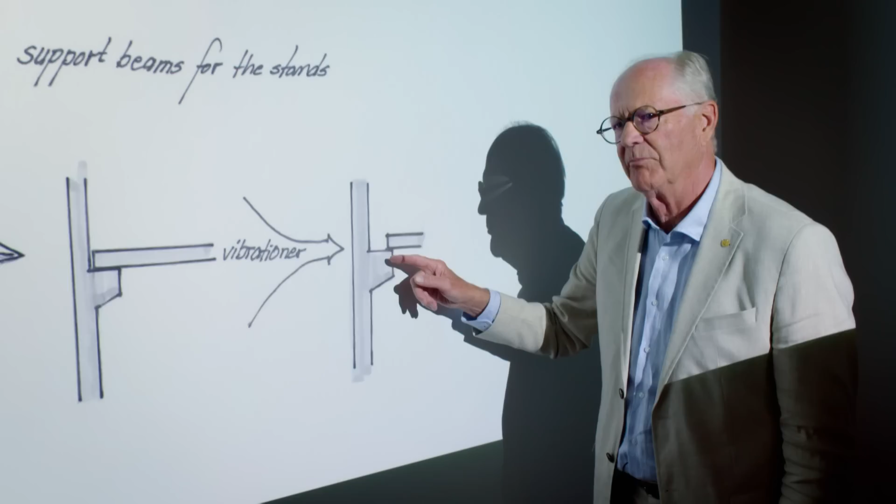Like this story in Sweden, and a Springsteen concert that really rocked the house. The whole arena started to fall apart. Music fans almost brought this structure to its knees. You can see the roof bouncing like a meter or something. It was very close to a big catastrophe. But what could nearly take down an entire stadium?

Gothenburg, Sweden's second largest city, is home to just over 500,000 people. But for a small city, it has a big music scene. Say Swedish band, and chances are most of us think of ABBA, who burst out of Stockholm in the 70s. Although less well known, Gothenburg has long been home to a much cooler, edgier music scene.

Johan Lindqvist is a local music reporter. It's been a music town for many, many years. The music here comes from the underground. We have a lot of metal, hip-hop, reggae music. We have great venues and a lot of vibrant music life.

This is Gothenburg's Nya Ullevi Stadium, named after the Norse god of games and sport. With a capacity of 75,000, the more than 200-meter-long oval is the largest outdoor arena in Scandinavia and has hosted some of the biggest names in music.

Lotta Nibel is CEO of the company that runs the Ullevi. So, this is where the magic happens. And through those doors, you've had rock stars like Madonna, you had Pink, Coldplay. You had loads of famous people walking in and making magic for thousands and thousands of people.

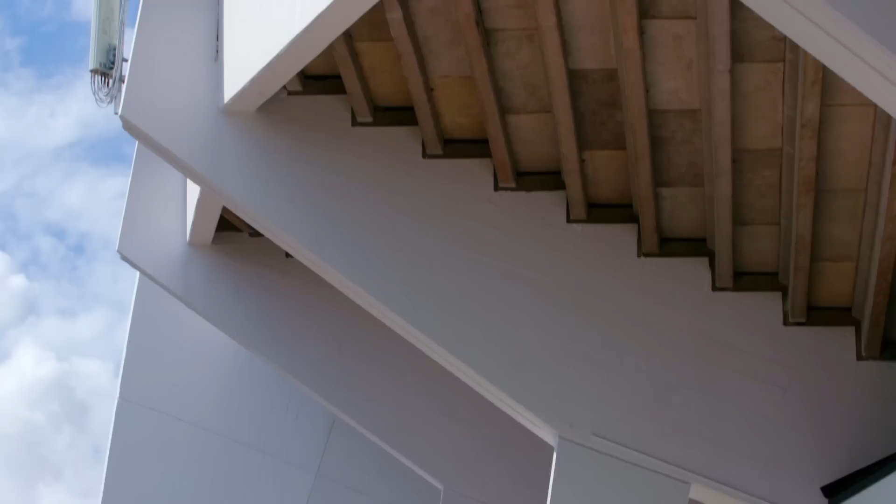This part of Gothenburg sits on clay. It's a great flat surface for a soccer pitch, but the concrete structure of the stadium would need much stronger support. The solution was a network of piles beneath the seating areas.

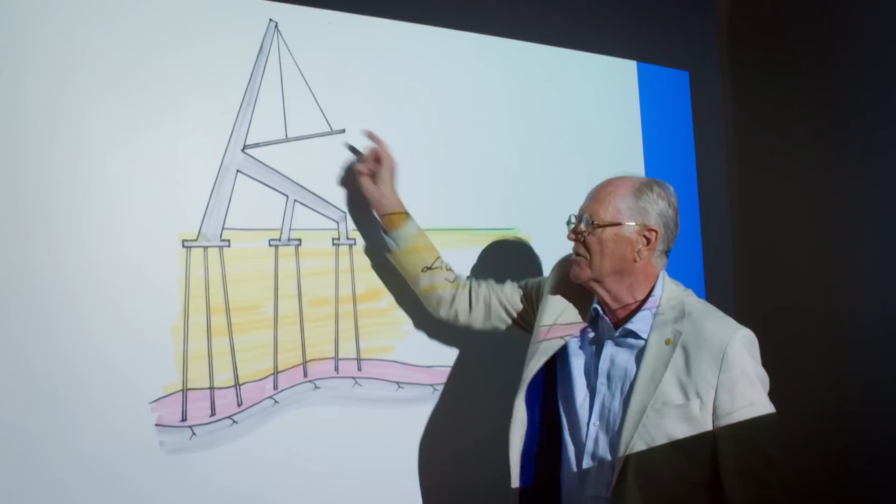Here we see a cross-section of Ullevi with the main structure, cast-in-place concrete. We have the clay layer, we have the moraine, and we have the bedrock. And here are the concrete piles that go all the way down to bedrock, which carries all the loads from the arena.

In the 1980s, Ullevi began hosting concerts, and one of its first acts was Bruce Springsteen. In '85, Bruce Springsteen was playing 2 nights at Ullevi, and it was his biggest tour up to date. I mean, it was bigger and more popular than ever, selling out big arenas all over the world. So, I mean, there was a kind of hysteria going on, of course.

Stefan Hammerströ was working in the arena at the time. I was only 18, 19 years working here, so everybody had bought the album Born in the USA, so they knew the songs and they were ready for the concert.

It was about 65,000 people. At that point, that was the biggest crowd at Ullevi for any concert, and I guess there were mostly teenagers there. It was a lot of energy and a lot of jumping up and down.

During the concert, the energy was building up, so it was crazy. We who worked in a kiosk couldn't stand still, you automatically danced in the kiosk. Towards the end, Bruce played the old classic Twist and Shout, and people got even more crazy than before, and the whole arena moved like this, 10 centimeters or something. And then you looked up at the roof, you could see it bouncing like a meter or something when you saw it from here.

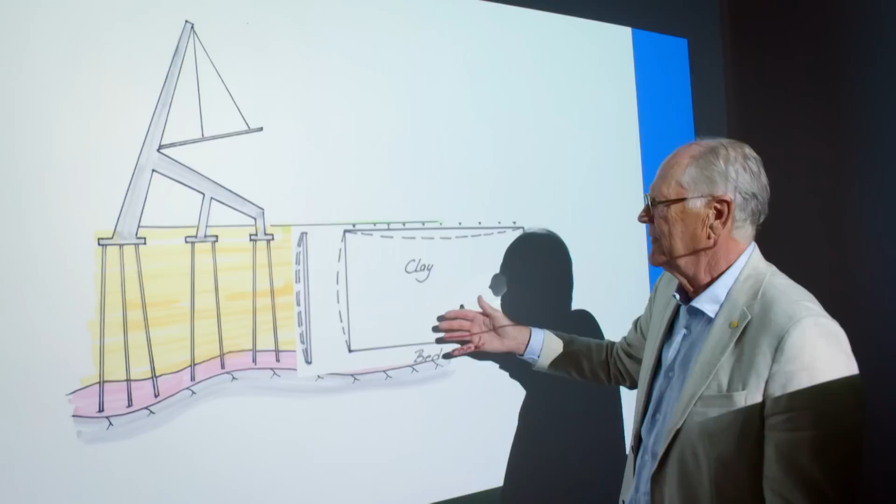The source of the problem wasn't in the stadium structure itself, but in the ancient ground beneath the soccer field. Here in the inner field is a lot of clay, and when the audience started to jump here, that meant that the clay started to move like this.

Back in the 50s, the pitch, or infield, was built to have two football teams and the referee running around on it, not 20,000 plus excited fans jumping up and down. All that jumping wasn't just pounding the floor, it was also rocking the stadium and its towers.

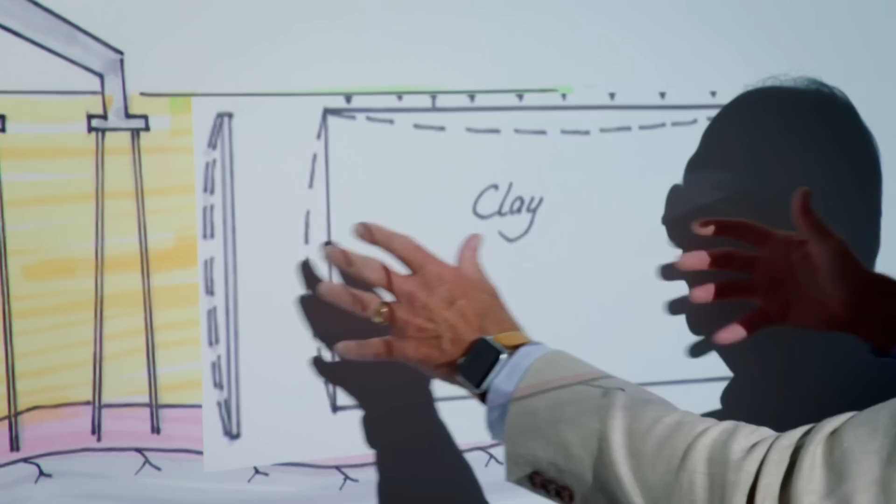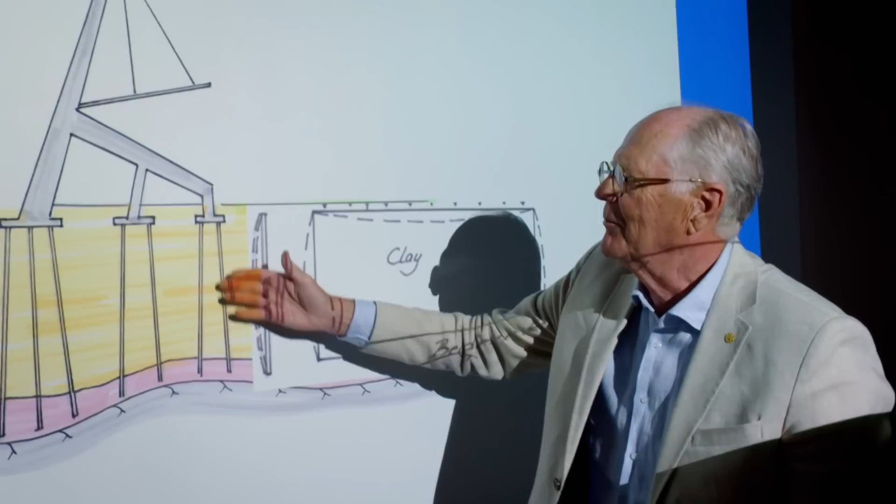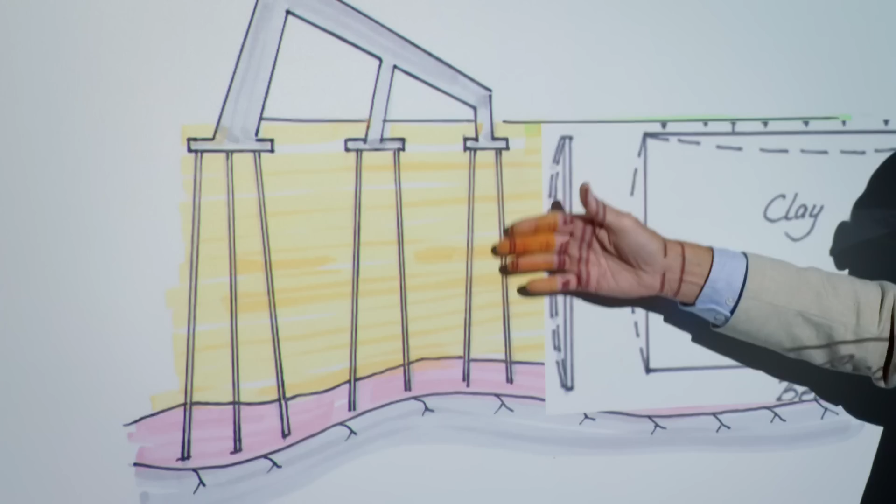So the force from the audience goes into the clay. The clay expands like a pulse, and that affects the piles, so they bend out a little, not very much, a couple of centimeters perhaps, but that gives deformation that will be transmitted up to the structure and enlarged. So it's a rhythmic pulse coming up also into the structure.

We've all felt the pulses of heavy bass from loud music. Imagine that happening to the clay beneath the pitch over and over, pushing on the piles supporting the stadium and its towers. The pulses weren't the only problem.

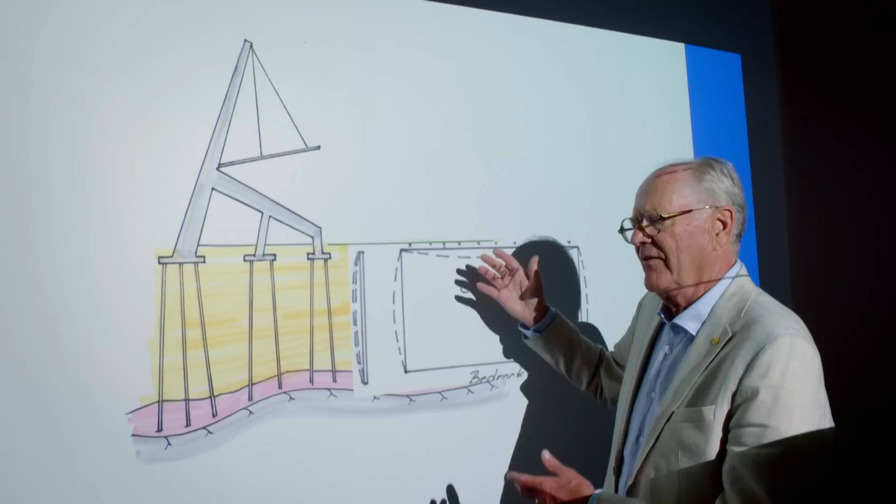The frequency of the jumping matched the clay's natural resonance. Experts calculated the resonance of the clay was between 1.5 and 3 hertz, or cycles per second. The music and the jumping of the crowd was 2.4 hertz, right in the sweet spot for causing mayhem. That is close to the resonance frequency of the clay, and then there is no damping, and that's why it's enlarged, and it's going to increase all the time as the pulse keeps going on.

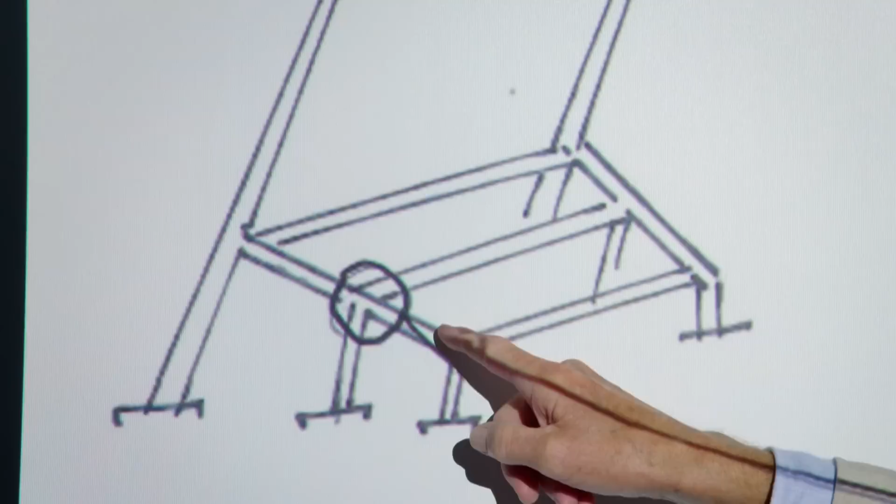Although fans didn't realize it at the time, the stands were dangerously close to collapse. Here we see the concrete structure, and between those constructions there are concrete beams, and they are supported like this. This is probably about 20 centimeters or so.

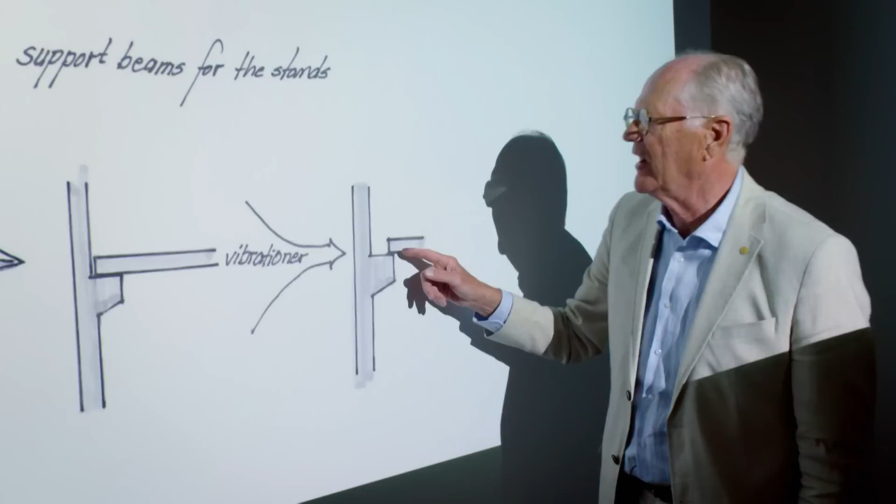During the concert, these started to move up and down and also sideways. In the inspection after the concert, they found out that the support was very limited and it was very close to a big catastrophe.

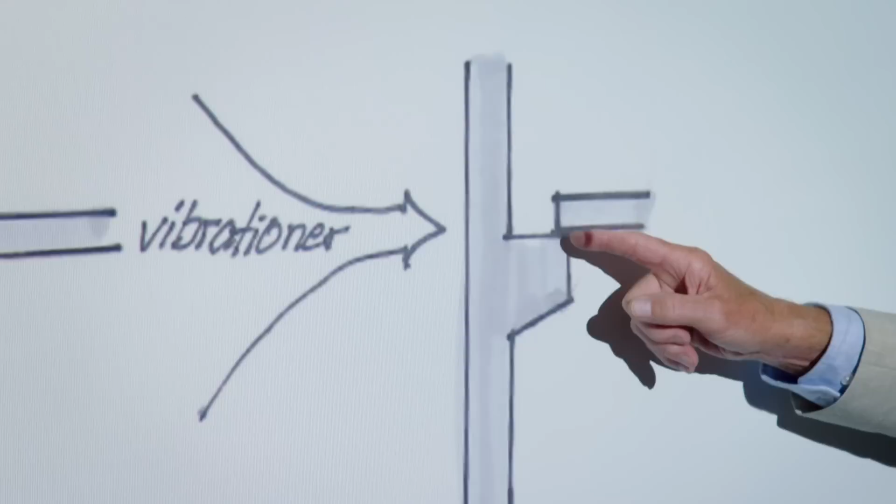These days, everyone jokes about the crowd nearly bringing the stadium down. But the truth is, they came frighteningly close to actually doing it.

Ullevi Stadium closed its doors while engineers resolved its structural integrity. Although the building itself was fine, the field needed support to prevent it from bouncing.

The stadium had to be reinforced using over 100 pillars, each having a diameter of 1.5 meters and a length between 20 and 60 meters, because you need to reach solid ground. As a result, you can see it in the garage, you can actually see the pillars and the size of them.

The network of piles was driven down into the bedrock. Thomas Tayland is Ullevi's construction project manager. Now we are under the pitch.

Here you see it from below, the roof in the garage. Over here, every 15 meters you can see the piles. Every one of these piles, they had to stand on the rock. So it's a big job, a lot of concrete.

Once the piles were driven into the bedrock, they were like a network of giant stilts supporting the pitch above. Now, however hard fans jump, the clay below and the stadium won't be going anywhere.

Three decades after that dramatic night, Springsteen returned to Ullevi. Are you ready to test this stadium? And proved the fix really had worked. This time, the only thing rocking was the music.